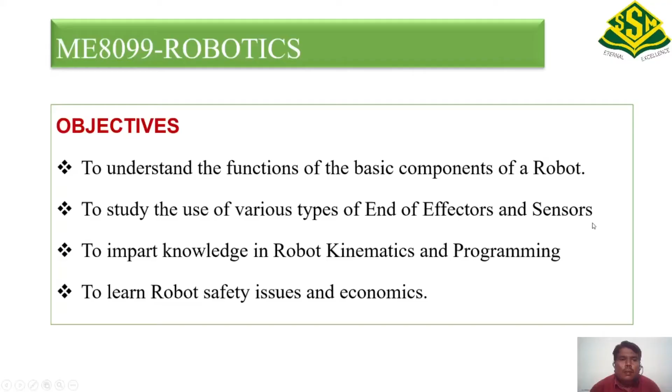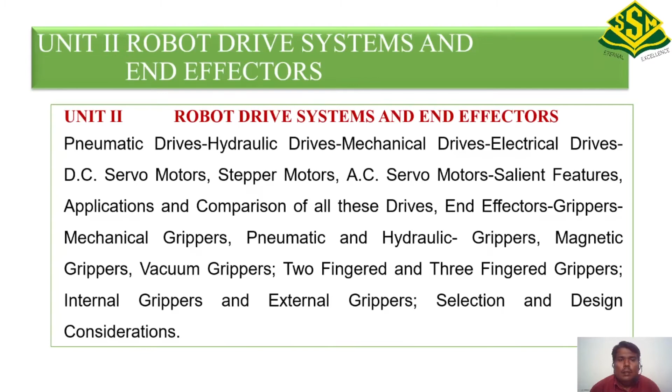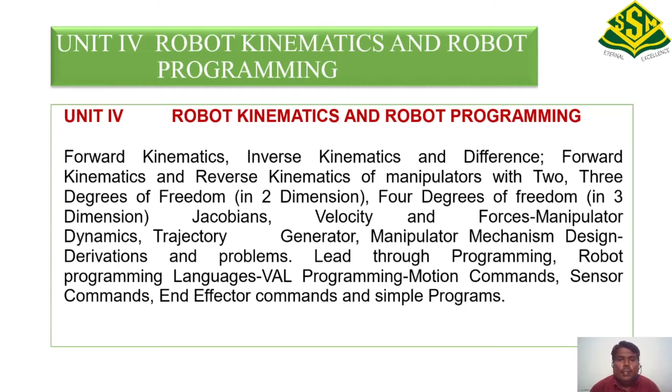Now, to study this particular subject, robotics, we will have to study 5 units. The first one is fundamentals of robot. Unit 2 is robot drive systems and end effectors. Unit 3 is sensors and machine vision. Unit 4 is robot kinematics and robot programming. Unit 5 is implementation and robot economics.

The textbooks of robotics are Industrial Robotics Technology Programming and Applications by Groover, and Robotic Engineering An Integrated Approach by Klafter. Now, let me start with what is a robot.

The term robot has come from the Czech word robota, which means forced or slave laborer. So this is just like a servant, and we are going to give some tasks to the robot, and it is going to perform those tasks just like a servant.

Now, the term robot was introduced in the year 1921 by Karel Čapek. Karel Čapek was a Czech playwright who used the term robot first in his drama named Rossum's Universal Robots. So in this drama, the way he described a robot is as follows.

The robot is a machine but look-wise similar to a human being. But nowadays, we use a few robots which do not look like a human being. So this is the way the term robot was introduced in the year 1921. But during that time, there was not even a single robot in the world.

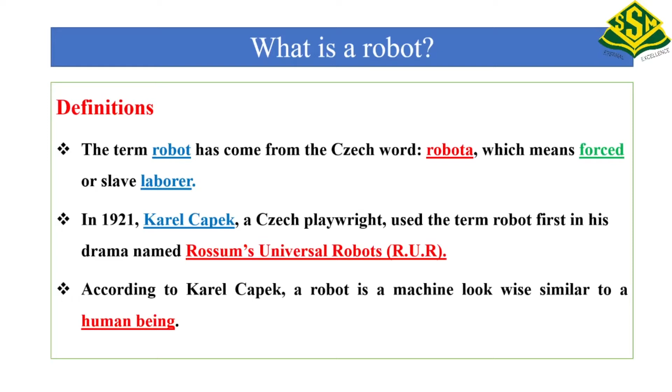Now, if you see the history, the term robot has been defined in a number of ways. For example, according to the Oxford English Dictionary, a robot has been defined as a machine capable of carrying out a complex series of actions automatically, especially one programmable by computer. So this is nothing but an automatic machine.

Then, according to the International Organization for Standardization, the robot has been defined as an automatically controlled, reprogrammable, multi-purpose manipulator, programmable in 3 or more axes, which can be either fixed in place or mobile, for use in industrial automation applications. So now, as I mentioned, the robot is nothing but an automatically controlled machine.

It is reprogrammable, that means the same robot can perform a variety of tasks, and to perform a variety of tasks we will have to change its program. And it is multifunctional, that means the same robot, the same manipulator, can perform different types of machining operations.

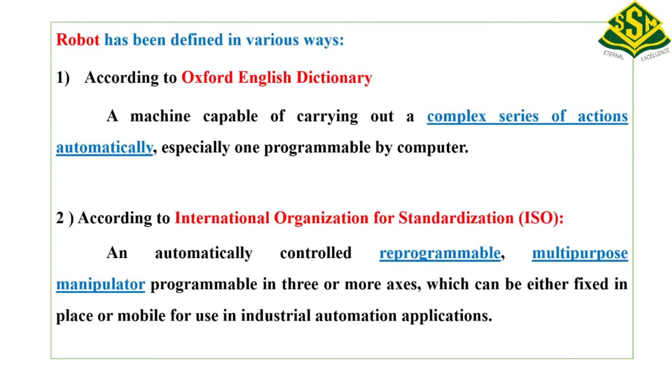Now another very popular definition is given by RIA, that is the Robot Institute of America. They defined robot as follows: it is a reprogrammable multifunctional manipulator designed to move materials, parts, tools, or specialized devices through variable programmed motions for the performance of a variety of tasks.

For example, by manipulator we mean robot with fixed base, and that is nothing but a mechanical hand. That means the human hand we are going to model, design, and develop in the form of an artificial hand, and that is nothing but the manipulator, and it is reprogrammable and multifunctional.

Now, in terms of reprogrammability, if we compare a robot with the NC or CNC machine, in a CNC machine, like computerized numerical control machine, we can perform a variety of tasks by changing the program. Similarly, in robots, the same robot can be used to serve a variety of purposes simply by changing the program. But there is a basic difference between the level of reprogrammability which can be achieved by the robot and that achieved by a CNC machine.

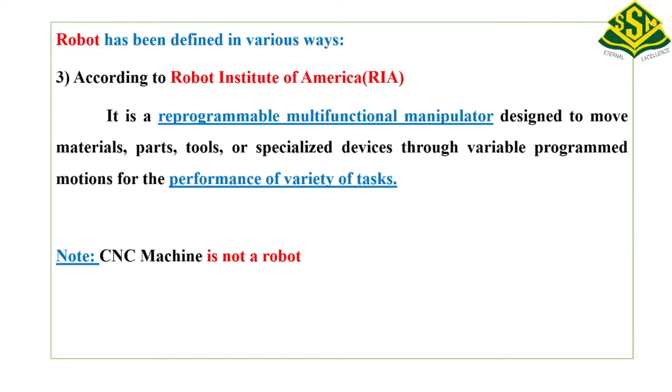So next, I am going to define what is meant by robotics. Now robotics is a science which deals with the issues related to design, manufacturing, development, and application of robots to perform a variety of tasks. The term robotics was actually coined by Isaac Asimov in the year 1942.

Isaac Asimov wrote one story called Runaround, and in that particular story he used the term robotics first. But let me mention that during that time, during 1942, there was not even a single robot in this world.

Here in robotics we use the fundamentals of different subjects, for example physics, mathematics, mechanical engineering, electronics engineering, electrical and electronics engineering, computer science engineering, and others. That is why it is bit difficult to become a true roboticist, because to become a true expert of robotics we will have to know the fundamentals of all these basic subjects. Robotics is actually a multidisciplinary subject.

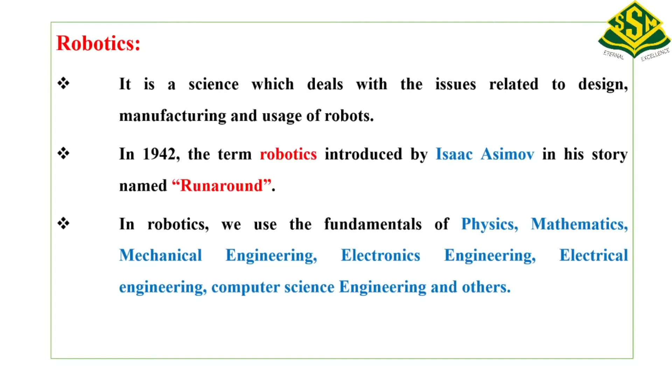Next, what is the motivation behind robotics? Why should we study robotics? What is the reason? If you see today's market, it is dynamic and competitive, and if you want to be in competition and in business, what will you have to do? You will have to fulfill at least three requirements.

First is reduced production cost and increased productivity, and finally improved product quality. So first you will have to produce goods at low cost, and at the same time the productivity has to be high, and the quality of the product has to be good. Now it is bit difficult to achieve all these three things at a time, and some of them are actually conflicting. So if you want to achieve all three, there is only one solution, and that is automation. You will have to go for automation if you want to achieve all three requirements.

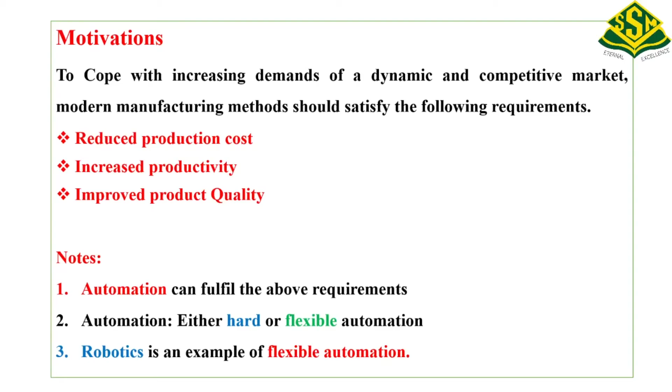Now I am going to concentrate on a brief history of robotics. If you see the NC machine, the numerical controlled machine, that was developed first in the year 1950, but the robot came after that. The first robot was developed in the year 1954. In 1954, the first patent on the manipulator was filed by George Devol, and he is known as the father of the robot. In 1956, Joseph Engelberger started the first robotics company, named Unimation, the first robotics company, started in the year 1956.

Then in the year 1962, General Motors used the manipulator named Unimate, and this particular robot was used in die casting application.

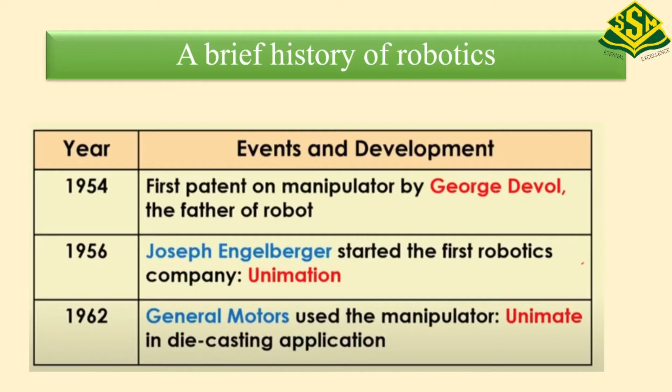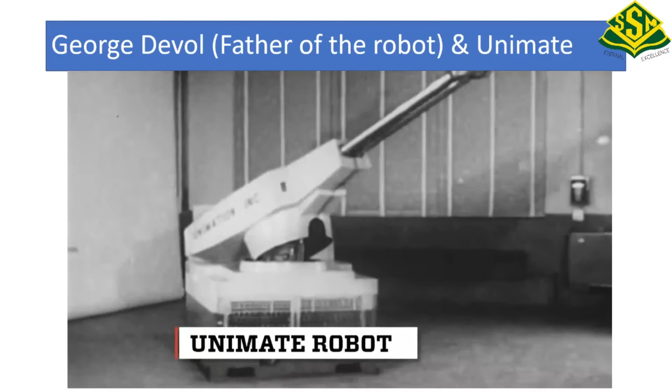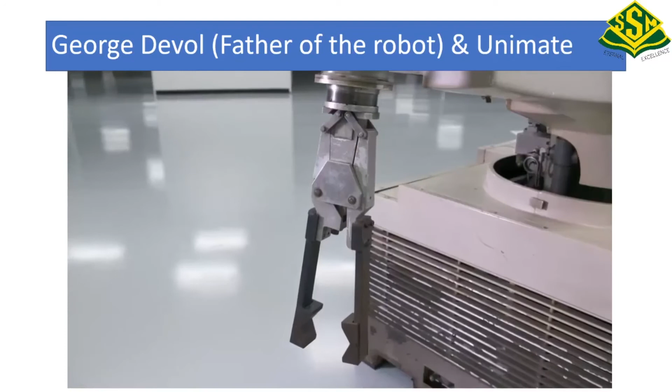So in this video, you can see the father of the robot George Devol and the company Unimation, which patented the concept of the robot and the technology associated with it in 1954, the very first one that was used. This is the Unimate robot showing off its moves back in 1967. By then, it had already been on the job for several years. Has the Unimate been properly acknowledged and celebrated? As well they should, because for industrial robots, the Unimate is the granddaddy of them all.

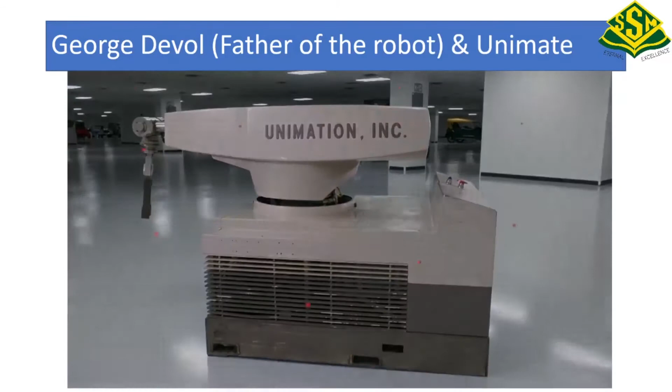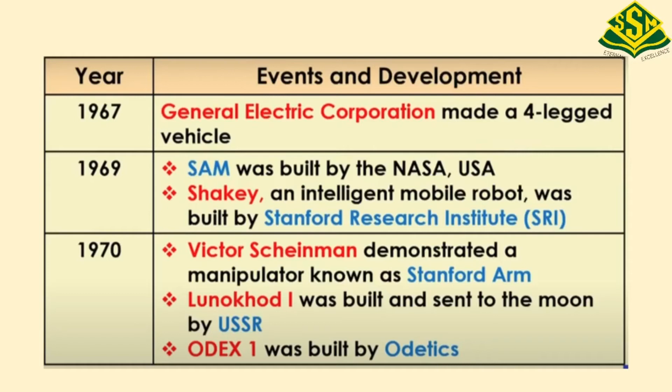Patented the... So next, in the year 1967, General Electric Corporation made a four-legged robot, and this is a four-legged vehicle, and they demonstrated and it worked well. In 1969, SAM was built by NASA, United States of America. SAM was the name of the particular robot built by NASA. Then Shakey, an intelligent robot, was manufactured by Stanford Research Institute, SRI. In fact, Shakey is the first intelligent mobile robot, developed in 1969. In 1970, Victor Scheinman demonstrated a manipulator known as Stanford Arm, and the Lunokhod 1 was another robot sent to the moon by USSR. Then ODEX 1, another robot, was built by Odetics in the year 1970.

This video shows a four-legged vehicle.

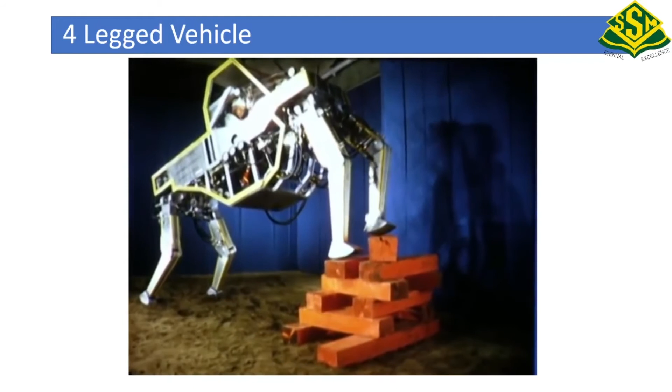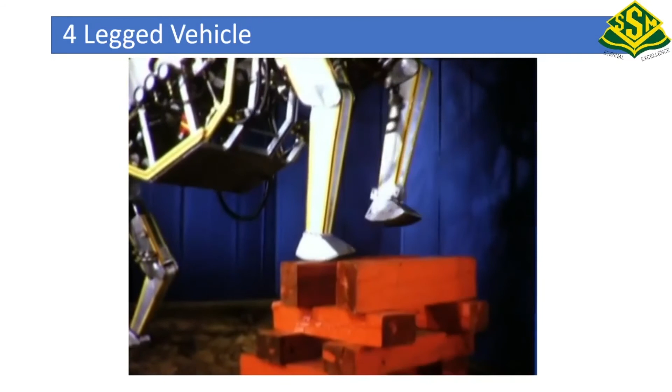Next, Shakey, an intelligent mobile robot.

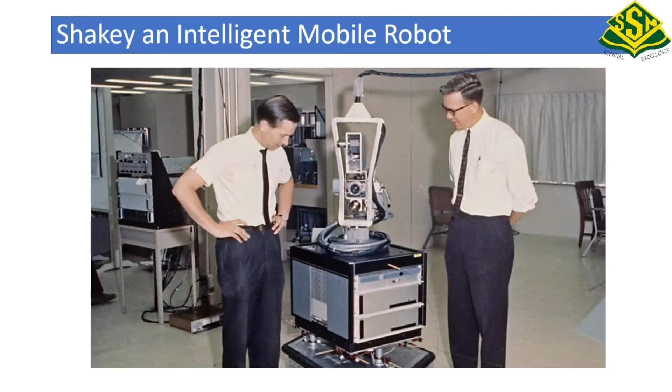Next video, Lunokhod 1.

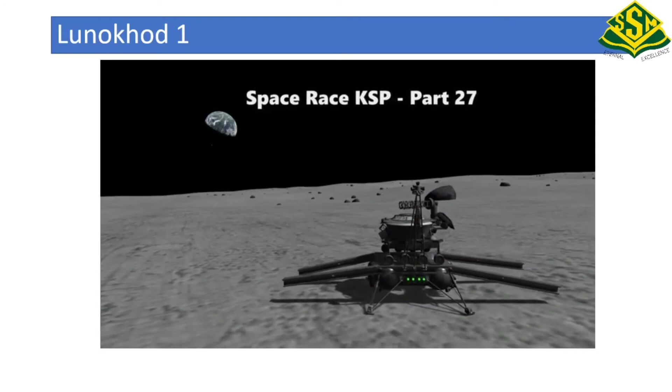The next video, Odex 1.

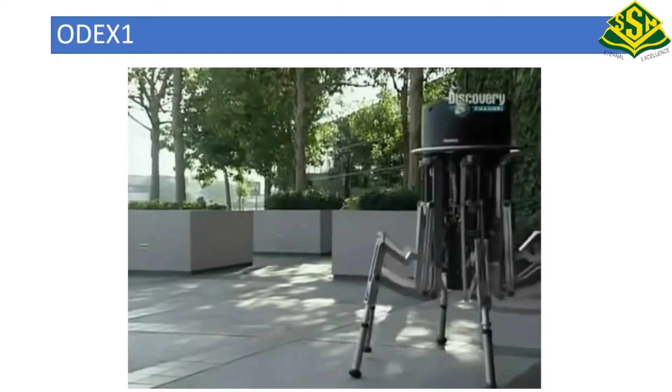One of the most revolutionary six-legged robots ever made is Odex 1. Built in 1983 by Steve Bartholet, it was years ahead of its time.

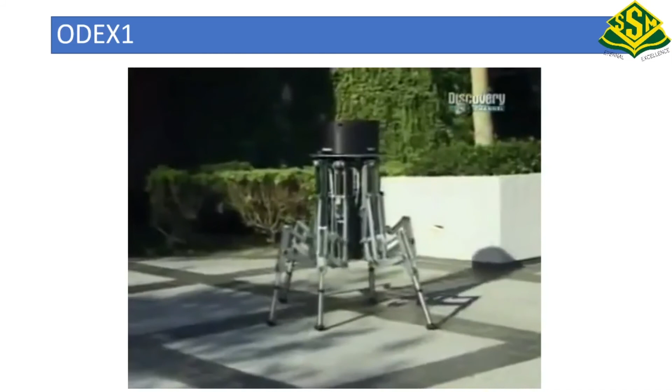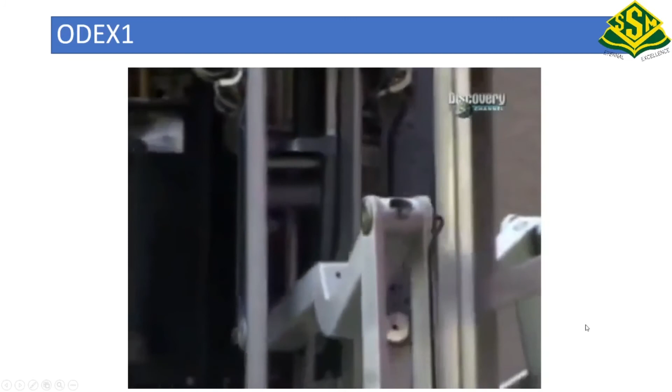The robot gets around by moving 3 legs at a time and maintains its balance by keeping the other 3 legs firmly on the ground. This is known as static balance. A static leg system is one that, when it stops or when it's in motion, always has at least 3 feet on the ground at one time, with the center of gravity somewhere within that pattern. So it doesn't have to actively balance itself. It's always stable, and when it comes to a stop...

Next, in the year 1973, Richard Hohn of Cincinnati Milacron Corporation manufactured one robot. The name of the robot was T-3, that is the Tomorrow Tool robot.

Then in the year 1975, Raibert at Carnegie Mellon University, USA, built a one-legged hopping machine, the first dynamically stable machine.

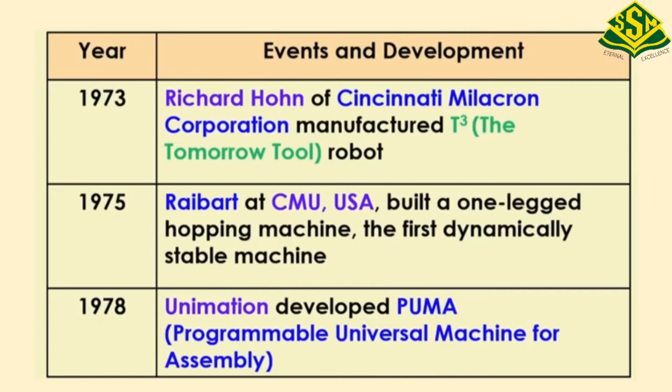In 1978, Unimation developed Puma, that is Programmable Universal Machine for Assembly, and this is actually a manipulator whose current version has 6 degrees of freedom, and it is very frequently used in various industries. So the video for Programmable Universal Machine for Assembly.

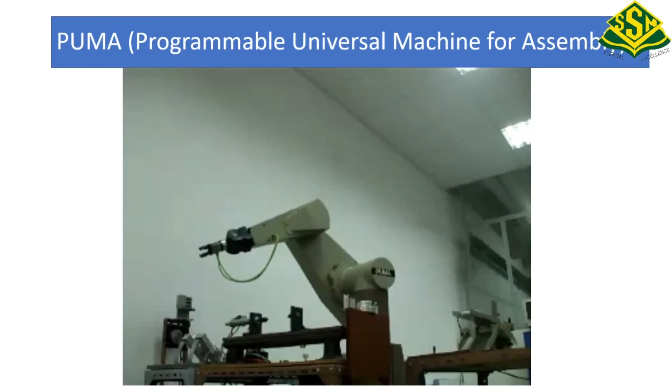Next, in the year 1983, Odetics, a robotics company, introduced a unique experimental 6-legged device. In the year 1986, Adaptive Suspension Vehicle, in short ASV, was developed by Ohio State University, USA.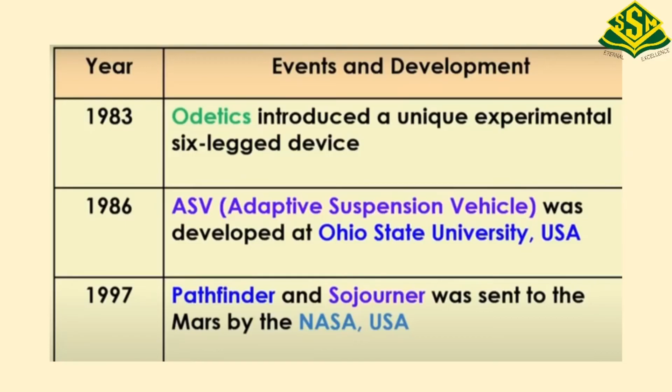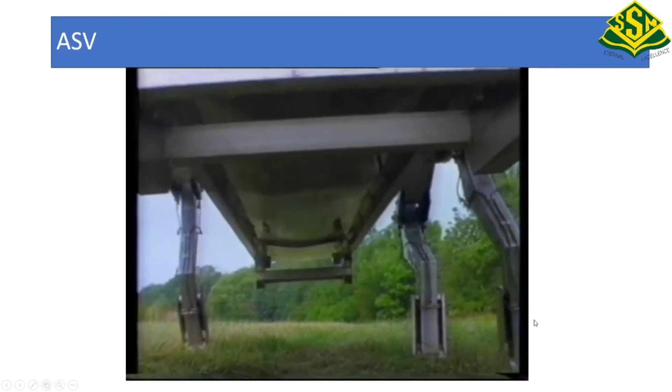So ASV. It's a 6-legged device.

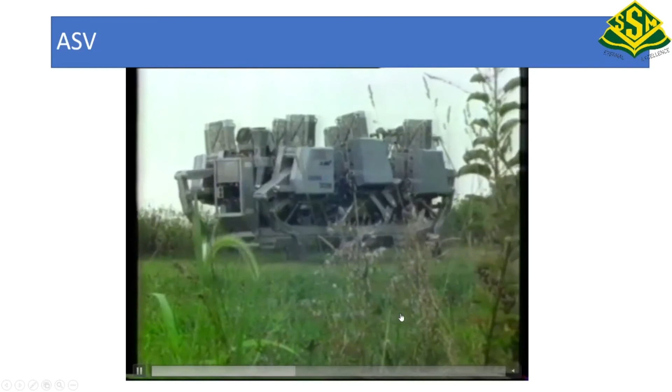Next, in the year 2000, Honda developed one humanoid robot, the Asimo robot.

Then in 2004, the surface of Mars was explored by Spirit and Opportunity, and this mission was successful. And you might know what happened in 2012: the Curiosity, one intelligent autonomous robot, was sent to Mars by NASA, USA, and this mission was successful. Then you might know what happened in the year 2015.

Sophia, that is one intelligent and a little bit emotional humanoid robot, was built by Hanson Robotics, Hong Kong, and this is, as of today, the most sophisticated intelligent humanoid robot. A few weeks ago, this robot was brought to IIT Bombay, where she would talk and communicate with other people, and some of you might have seen it in the paper or on television. So that very sophisticated intelligent humanoid robot is Sophia.

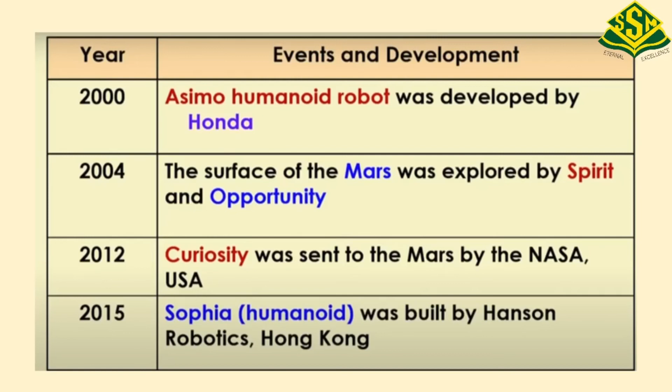So these are, in short, the brief history of robotics.

So in this video, this is the Asimo humanoid robot.

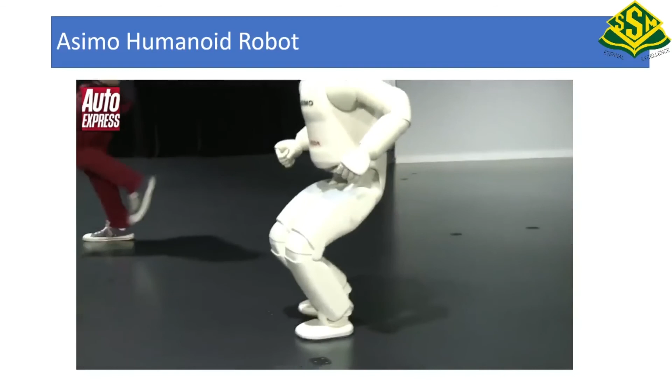To play sports. However, it's wise to warm up before any physical exercise, even if you're a robot. As well as run at 6 miles an hour, Asimo can walk backwards and hop. It can also kick a ball, so time for a quick robot versus human penalty shootout.

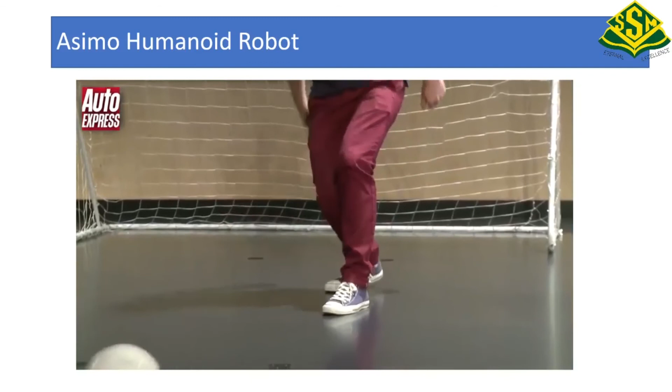That's 1-0 to the Autobots. But is Asimo as good at saving a shot as it is at playing?

The next Curiosity rover mission animation.

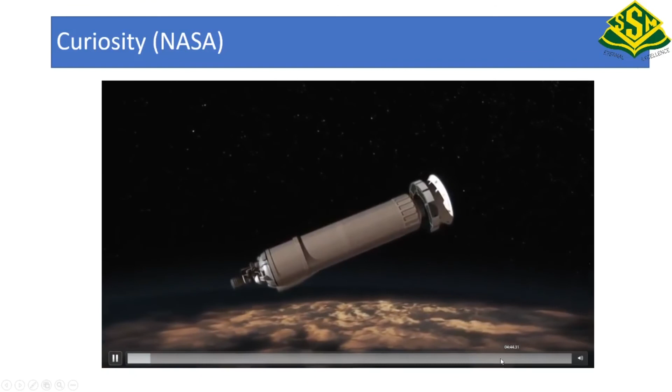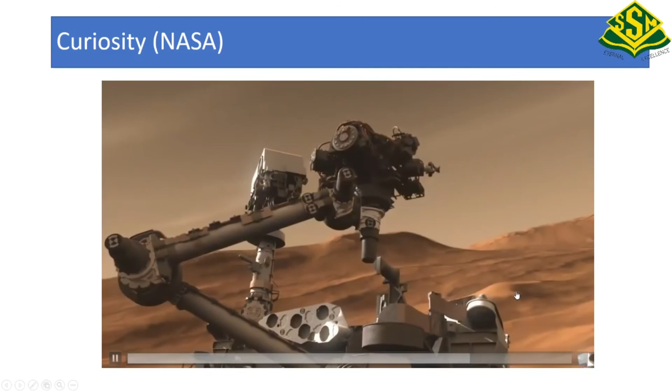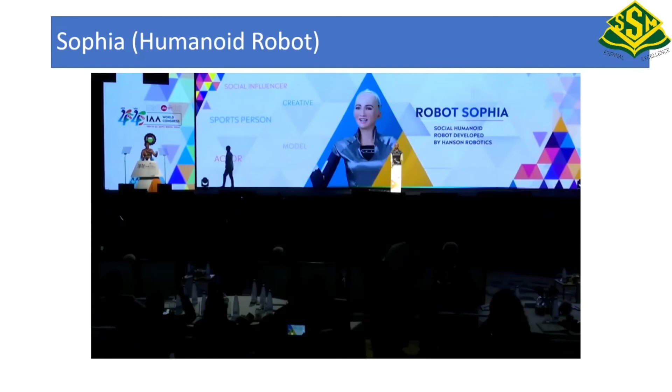The next video is the video for Sophia, humanoid robot. The highly intelligent robot. Sophia is able to display more than 50 facial expressions.

At the Future Investment Initiative 2017 in Riyadh, Sophia was granted Saudi Arabian citizenship, making her the first ever robot to have a nationality. Wow! It was in the year 2017. Look at her smiling away.

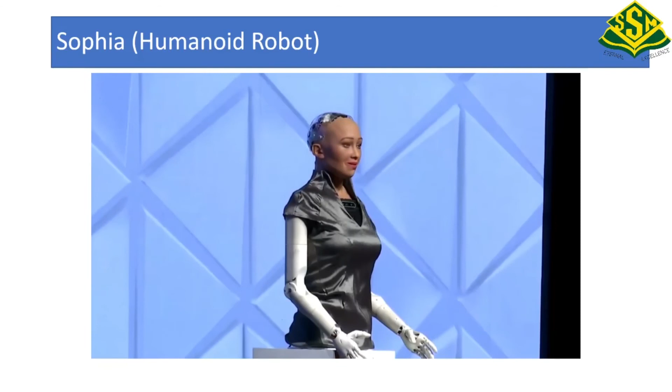It was in November 2017 when Sophia was named the United Nations Development Programme's first ever innovation champion, and is the first non-human to be so. Sophia is able to display more than 50 facial expressions.